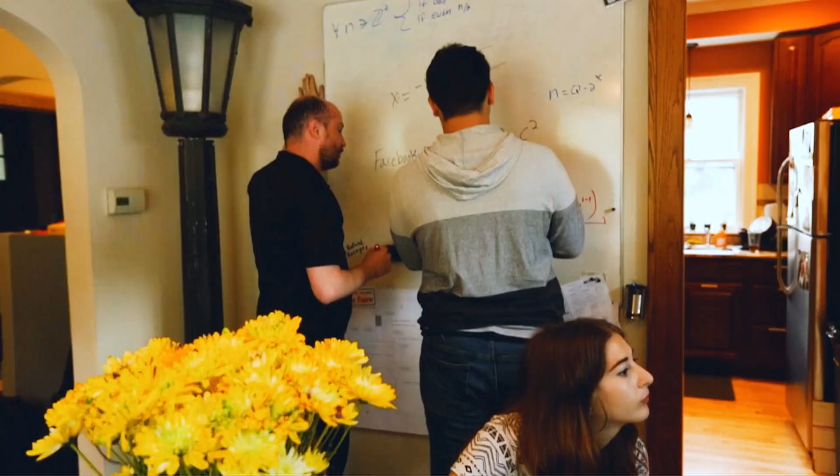It's like this source of creativity. I mean, it's like you walk in, it's like anything is possible. You can make 3D printed parts.

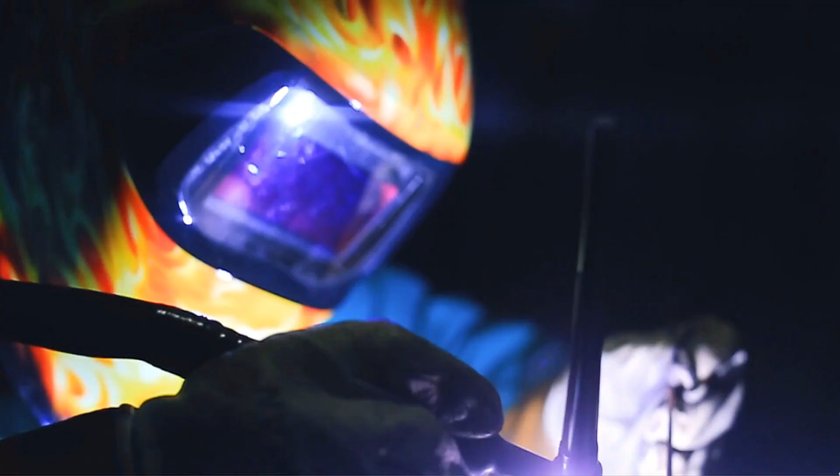You can do software, you can design things in CAD. Usually somebody's in the garage welding or laser cutting or milling, machining. We have the capability digitally and physically to make the majority of prototypes that you'd ever need in the world before going into manufacturing.

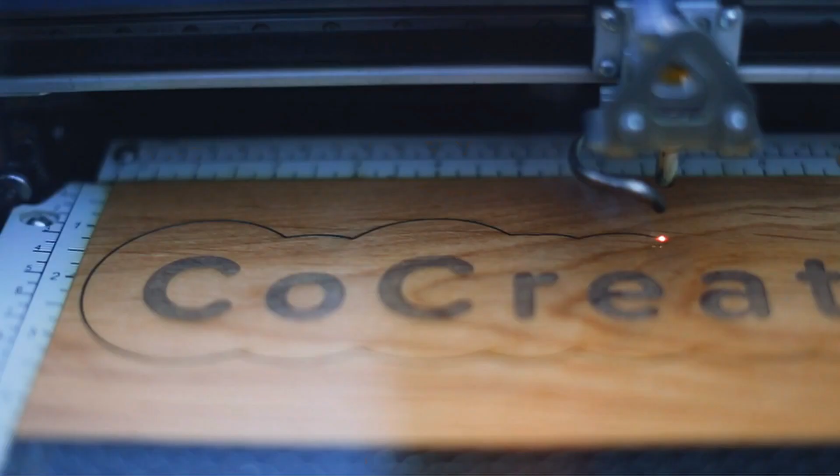One of the great things about CoCreateX is the fact that we enable people to discover other people who are passionate about their mission and who have the capabilities that are necessary to create something extraordinary.

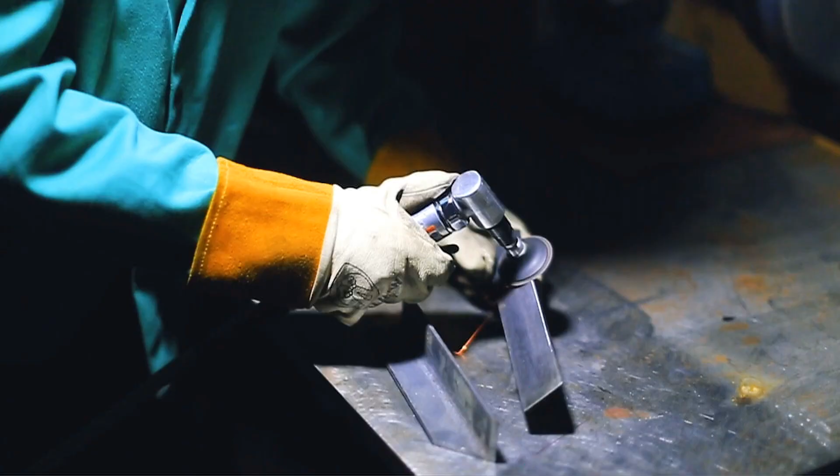Just a huge range of people with really interesting stories and an interesting set of expertise. Even if it's so far-fetched, like someone's making a medical device, to someone who's like, hey, check out, I can play this song with pens. It's that drastic. It's like you have so many different people.

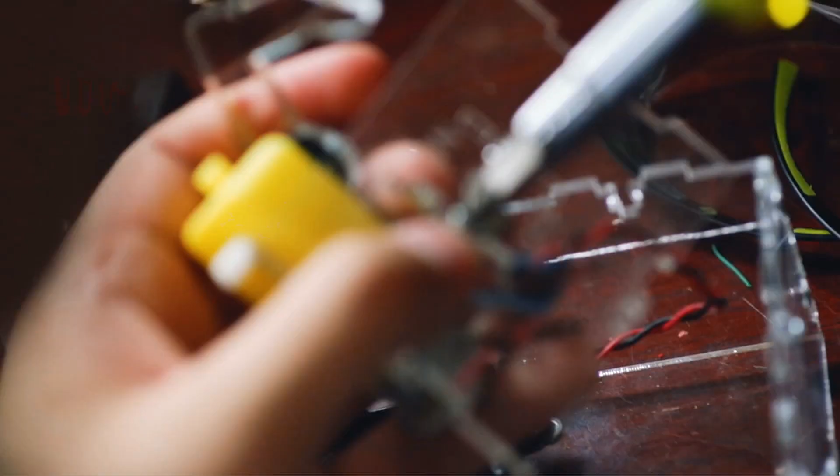It takes a lot of different passions and skills to make something successful, and we want to be able to break the barrier between the artists and scientists.

People come into this platform with all of this fire, and then when it kind of burns down, it's like this ember of gratitude.

CoCreateX became a community with a very fundamental culture, which is just help people with projects and say thank you. There's such opportunity in helping people to understand the value of helping each other and saying thank you, because it gets things done. It gets problems solved.

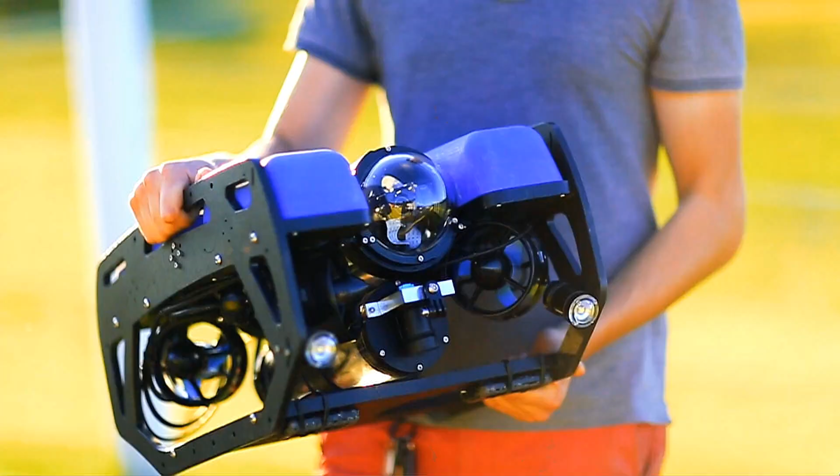And thank you could be any number of things. It could be thank you with time, it could be thank you with money, it could be thank you with wisdom and experience. I believe that this system actually can work, that people truly can get help if they need it and can give thanks, and that that's sufficient.

Help and say thanks allows you to be who you are and do what you love. And when that valuable exchange happens, it leads to human and economic output.

So the next step is being able to track thank yous. We are exploring opportunities to create a cryptocurrency based on thank yous.

And if you are being thanked for doing what you love, then that helps us accomplish our mission of a future in which everybody is enabled to make a living by just doing what they love.

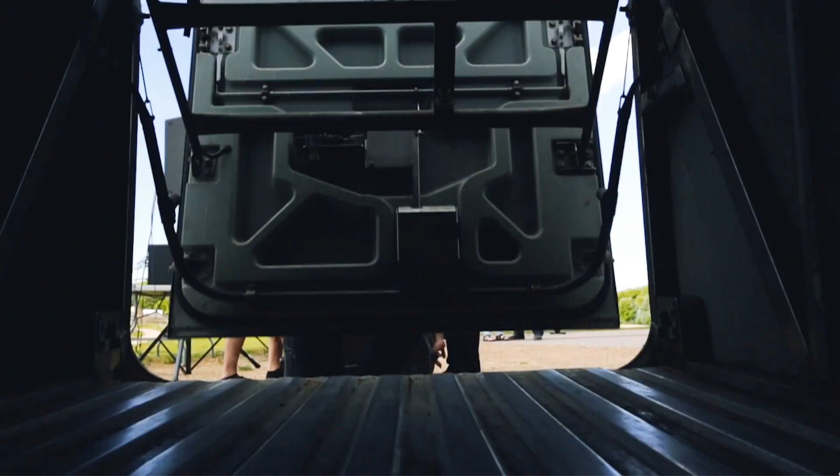Passion comes from purpose, and all of that grows with community. We've seen a culture of people helping each other and saying thank you emerge within this environment. So we're very excited about taking this culture and sharing it around the country. And so we're getting a bus, and we want to be able to incorporate all of this stuff into our bus.

We want to be able to have canvases for painting, 3D printers for designing and building. So this is a full-size motor coach. It has under compartments into which we're planning on building our makerspace. We're going to be hitting the road and sharing our culture of helping and saying thank you with people all over the country.

So with our CoCreateX creative spaces, whether that's in Minnesota, whether that's in California, even the CoCreateX bus, this traveling platform, you're always going to find people who are so excited to be part of it. You don't have to be alone in an endeavor. There's all these people wanting to help you and just excited to see what you're going to create.

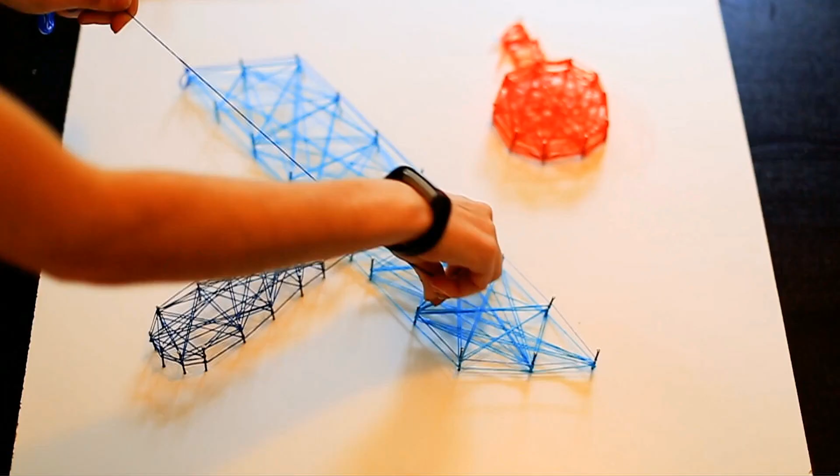All right, so that's CoCreateX in a nutshell, and we've been doing that. So we've been sharing our culture around the country and helping people with projects.

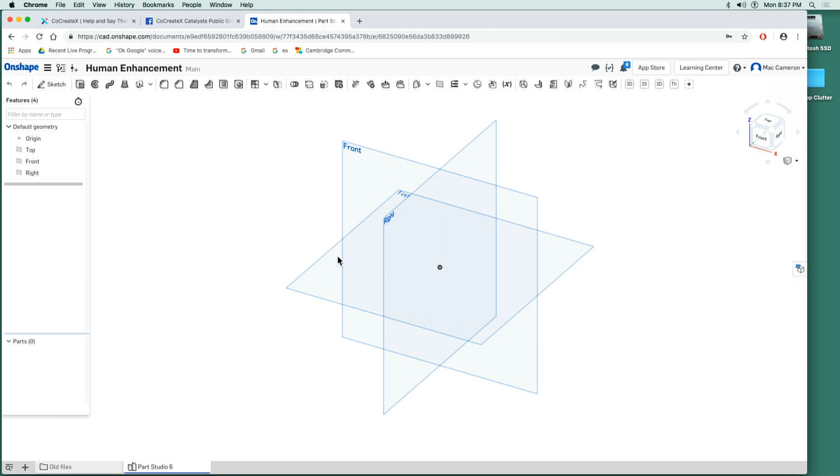So today, what we're going to do is go into a software that is very empowering for creators. It is called Onshape, at onshape.com, and this is a cloud-based computer-aided design software which allows you to create parts in a digital space, as we see here, and send that off to be manufactured.

Now, manufacturing can happen via three-dimensional printing. It could happen via laser cutting. It could happen via a whole number of different manufacturing methods. But this design software is so powerful because it creates solid bodies that can then be distributed to a number of different machines that have been built to manufacture the parts that we have on this software.

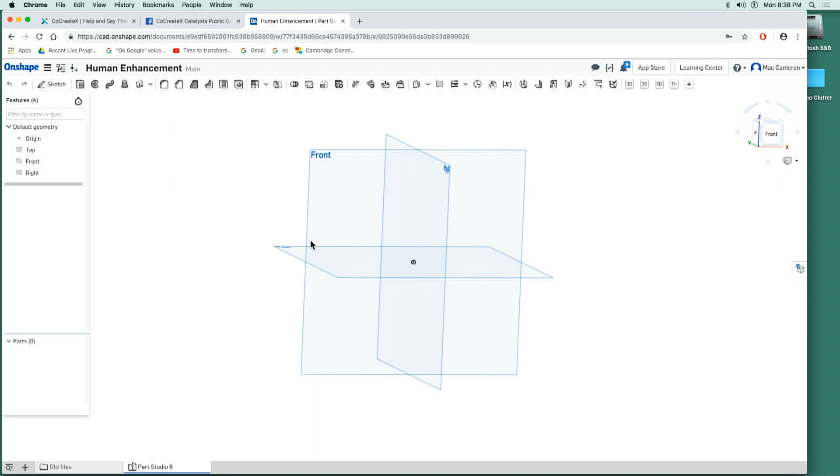So the part that I'm going to create today, something I have done some work on in the past, is going to be what I like to call a human enhancement, but really a way for me, while I'm at my house, to hold my phone in front of my face while I'm cooking or doing stuff around the house.

This is just something that I think will make me a little bit more efficient. A lot of times when I'm cooking, I either set my phone up on something on a table, or I just simply have it in my pocket, which is not very convenient in many cases. So what I'm planning on doing here is ultimately using one of these goosenecks, similar to this product that I got at Brookstone, and figure out a way to connect it to my body via either a belt or a strap or some other method.

So I'm just going to think here and kind of look at this thing. The goal is to be able to hold this somewhere around this area, so it's out of the way, but can also be moved to the side if I'm doing something here. So really it is the connection around this area that is going to be the most important aspect, and something that would need to attach to my body.

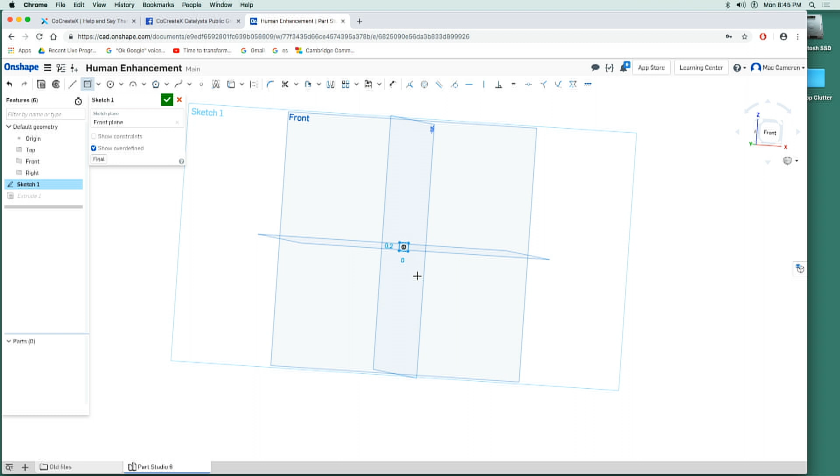maybe just like a kind of a neat square. I'm going to also change the units, workspace units, into millimeters. We go okay. I'm going to edit this sketch, and then I'm going to put a dimension on this.

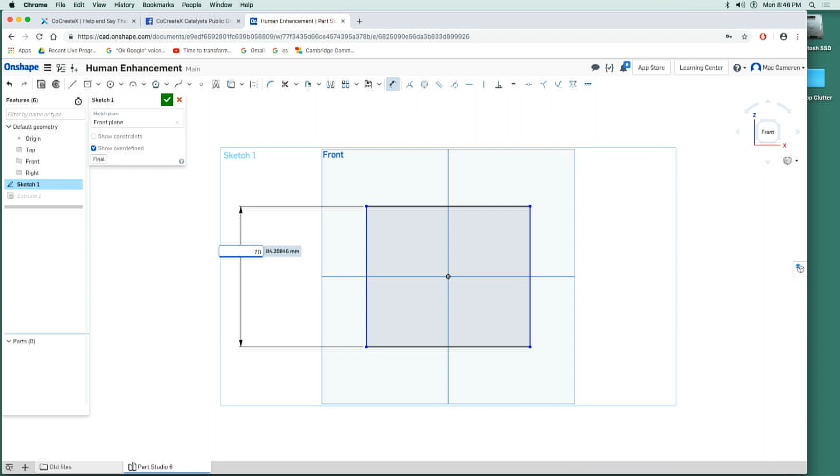Alright, how big do I want this to be? This can't be too big, otherwise it's going to really get in the way, but I'm going to say make it about 70 millimeters by 50 millimeters. Seems about right.

Alright, and then kind of the thickness - how thick do I want this thing? Probably, I'm going to do it pretty thick to be sure, because we're going to incorporate some hardware into this. So I'm going to do 40 millimeters thick.

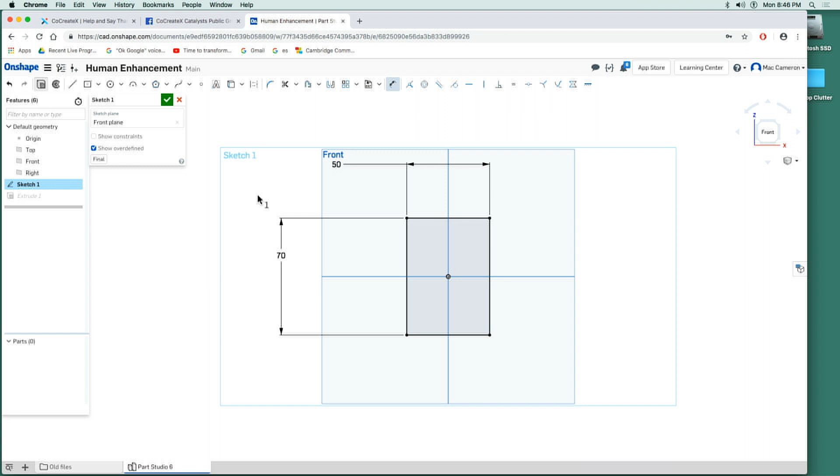So I've designed my box here. Now I'm going to extrude it. Oh, looks like I already have my extrusion here. So I'm going to create this as 40 millimeters thick. Alright, perfect.

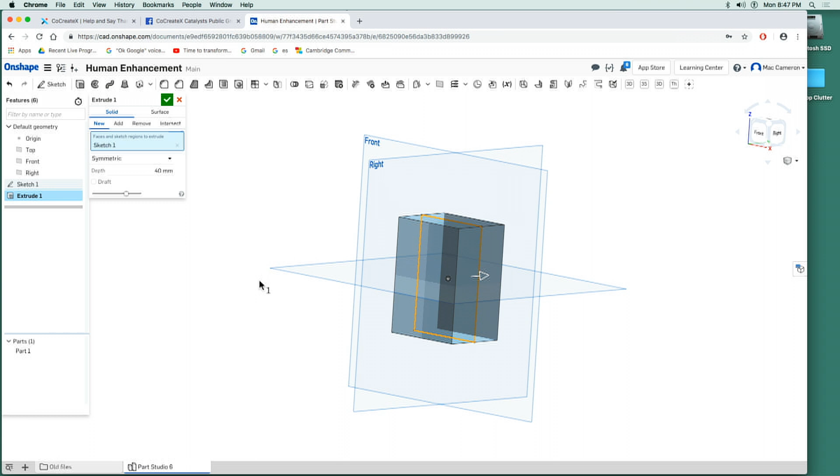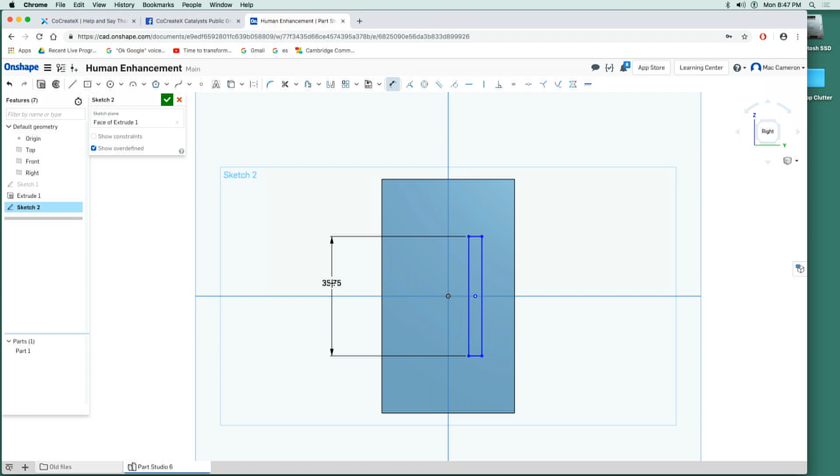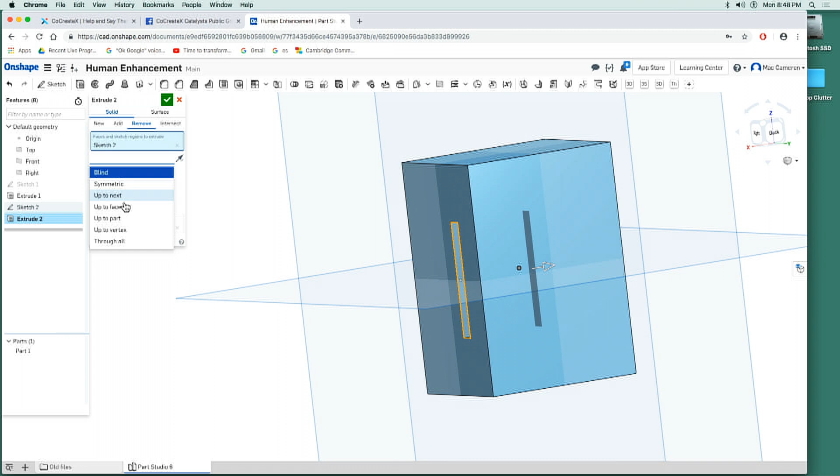Okay, so next up I'm going to create the channel for this piece by doing an extrusion cut. Again, I'm going to do 35 millimeters by 4 millimeters, and let's do it slightly over here. So I'm going to go ahead and dimension this 35 by 4, and then I can extrude cut. So I'm going to remove this material. I can even do through all. Alright.

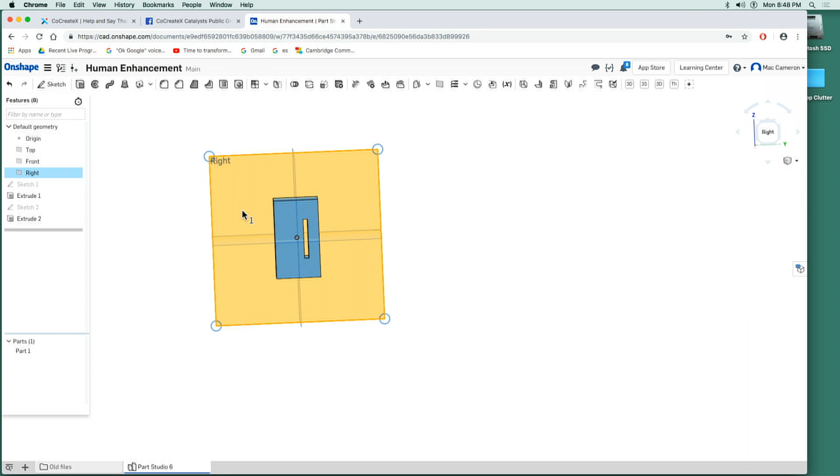Okay, so just to give a good look of what this is going to look like on my body, I am going to simulate what this belt is going to look like by doing one more sketch here. Then I'm actually going to create a line that's approximately 150. The thickness of my waist here is approximately 300 millimeters. So what I'm going to do is just simulate the making of this belt so I can kind of see what it looks like.

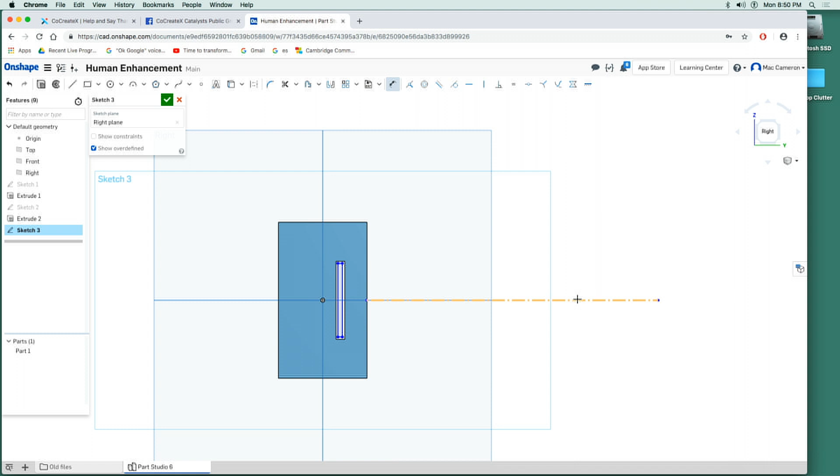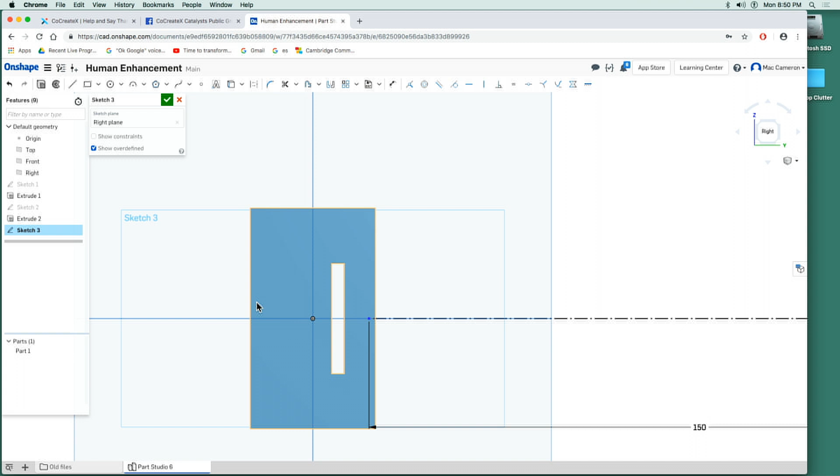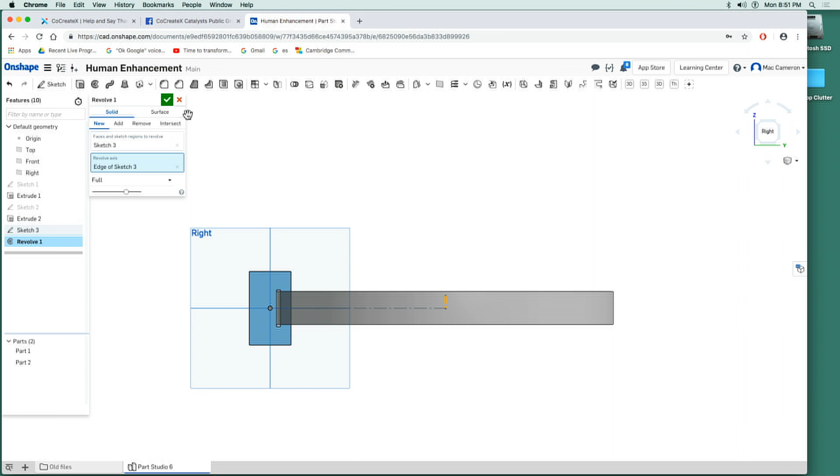Okay, so I'm going to do 150. Looks like this didn't quite work. Alright, 150, I'm going to do my square box. I'm going to do a construction line here, just going to rotate this around itself. And I'm going to say that this is a new piece.

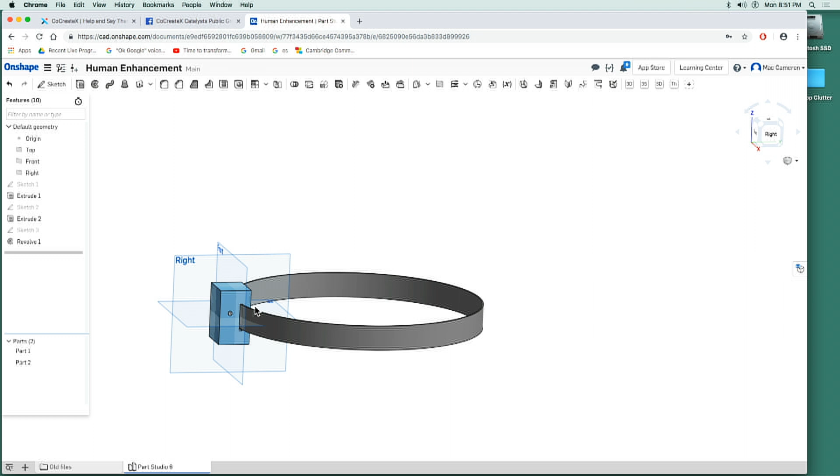Okay, so now what we have is kind of our belt area. I'm likely going to be facing - like this is going to be on the back side of me to start, but it could totally be on the front side as well, or on pretty much any part of me, I guess, if we are testing it out. I don't quite know what it's going to look like yet, but I'm going to make this brown because my belt is brown. Where's a good brown?

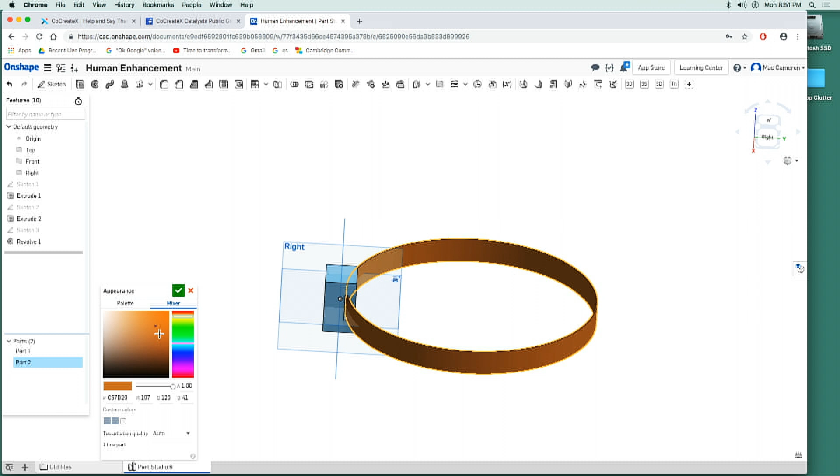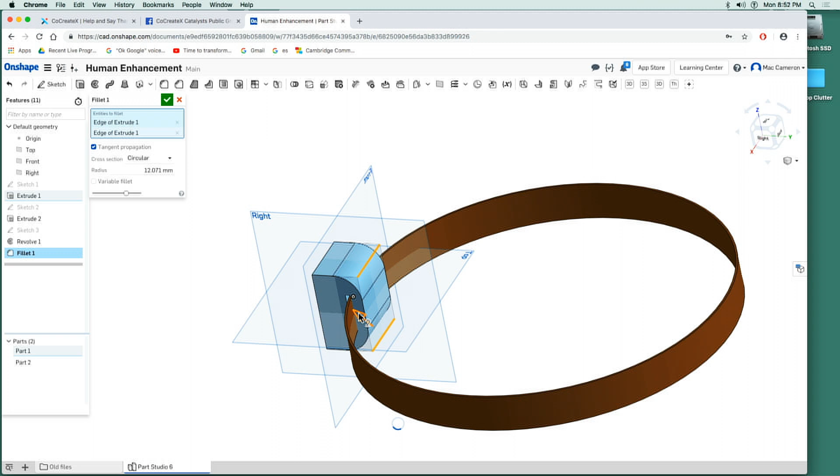Alright, so now I've got my initial part here. And so this is going to be touching my body here, so I'm going to want to maybe fillet these sides so it's not uncomfortable. Perhaps make it like that. That looks like it's going to be slightly more comfortable.

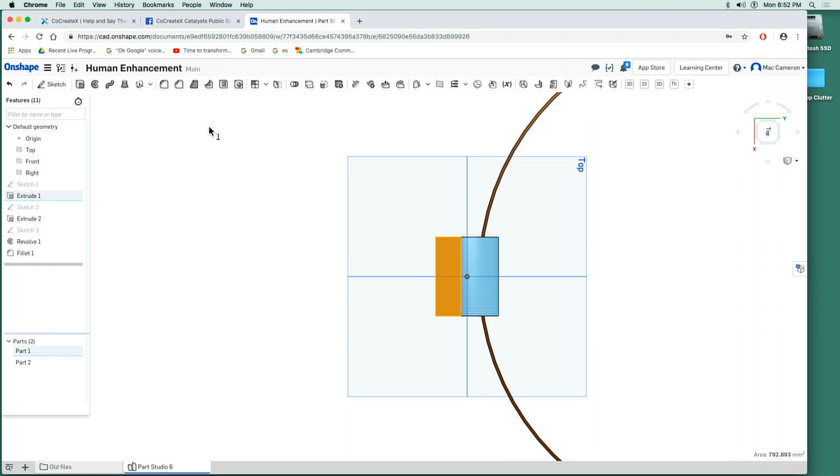And I just had an idea that I could probably just drill this hole all the way to the very bottom by sketching a circle right here. And one of the things I'm going to quickly do is just measure the thickness of this piece, to see how thick my hole has to be. And this is, let's call it 10, 11, 12, 13, yeah probably about 13 millimeters. So I'm going to do D.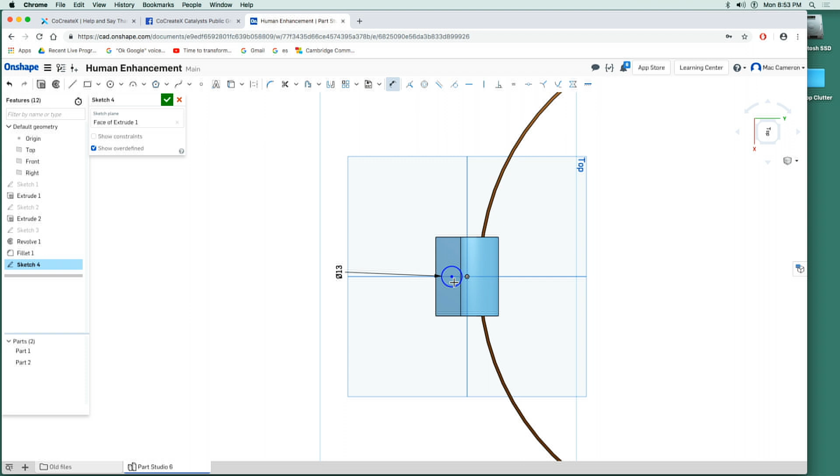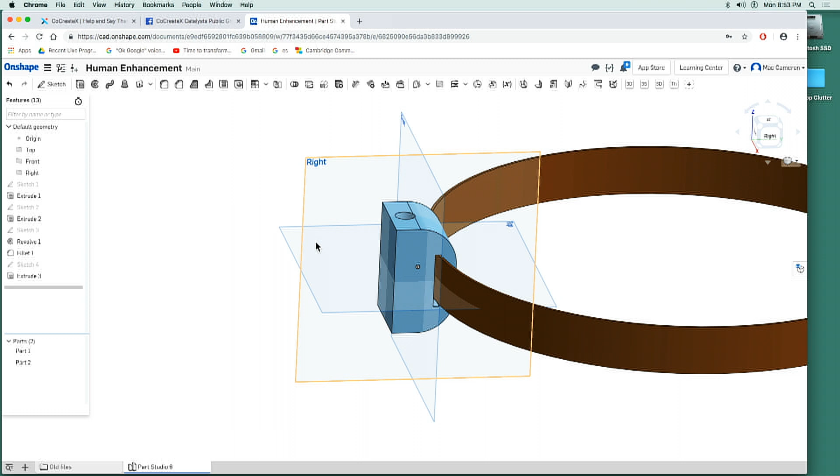And then what I'm going to do is I'm going to extrude this, remove, whole way down. And... I mean, there we go. So now, when I actually have the rod there...

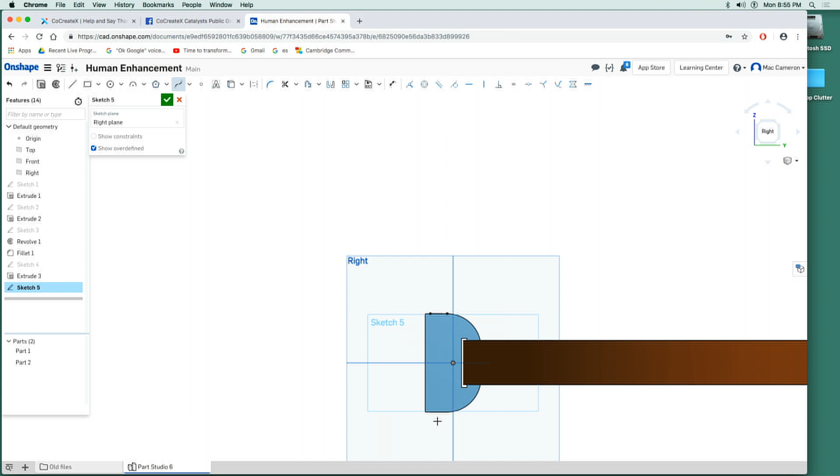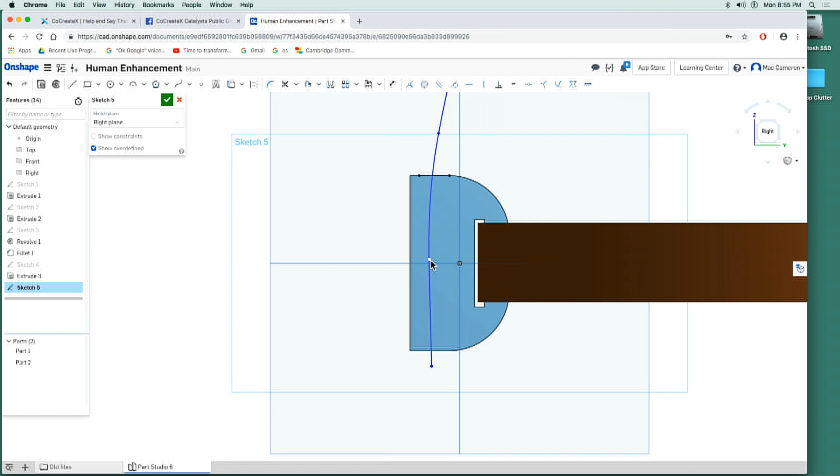So let's just say this rod is ultimately - it's probably going to go up something like that. Alright, so I'm just making the rod to see kind of what it looks like.

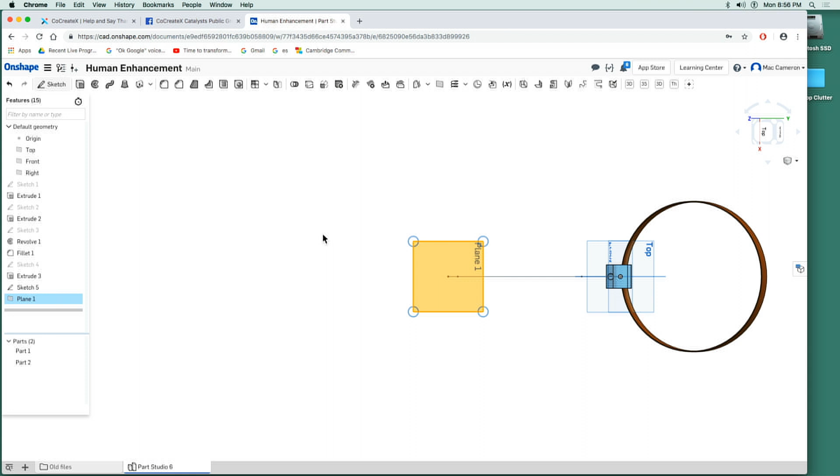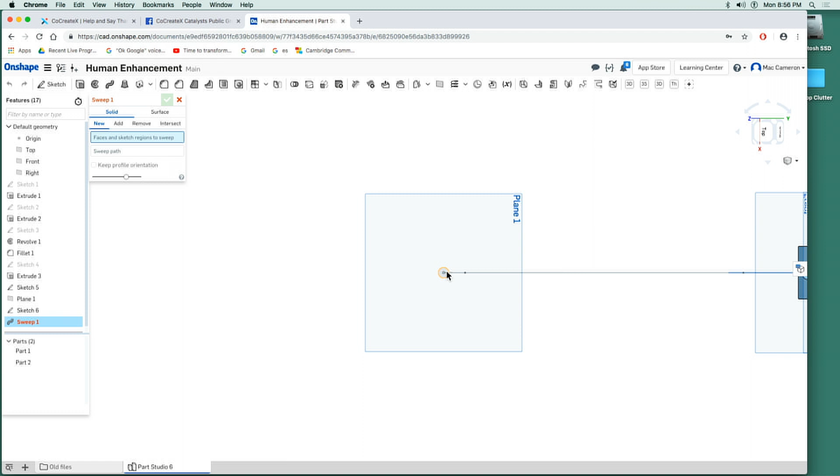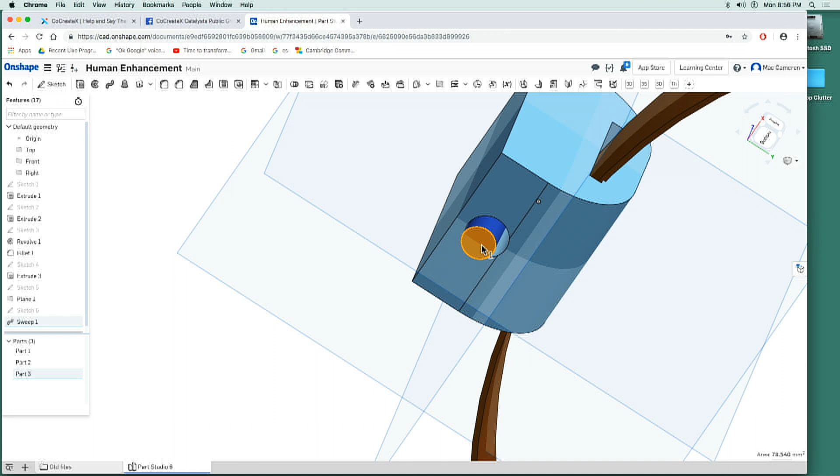So the rod is about 10 for this. Press OK. Alright, and then on this side, it's not perfect, but I think this is actually pretty darn close. I will be able to... oh, looks like pretty close to being done here.

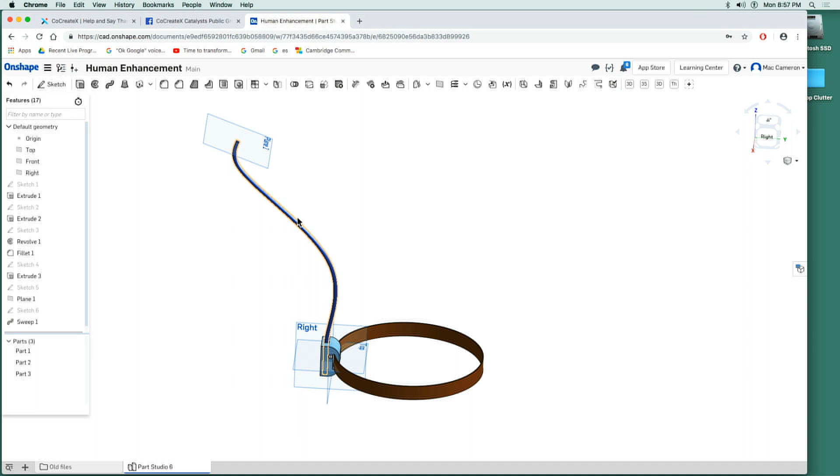But yeah, I mean this essentially could be one way to do it. So this is my belt, this is the device that I'm ultimately going to 3D print and test out, and then our rod is right here, in which case I can use the equipment that is currently on this piece by just unassembling this, using the same bolt, using the same screw, but just connecting it into the piece that I had made and test it out. So that is a start. There's certainly some things that need to be done, but hey, let's 3D print this out and maybe check it out next week.